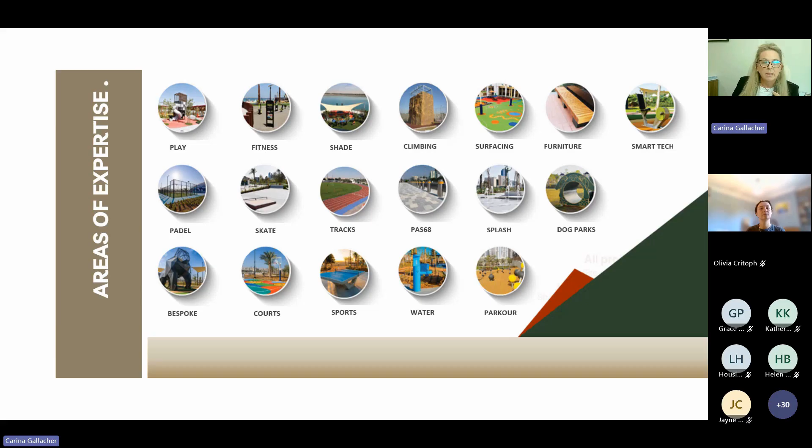I work with main clients, landscape architects and design consultants, specialist fabricators and contractors. Our projects are generally solution focused and grounded in local codes, compliance and safety requirements, so projects are delivered as intended within the region. Let me just give you a flavour of some of the installed projects.

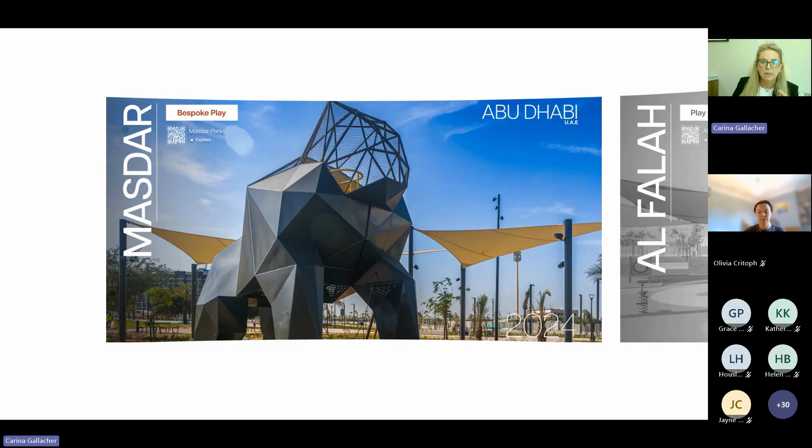So this is an iconic sculptural play park, which has since become known as Gorilla Park. Next, we have a playful destination in Al Falah.

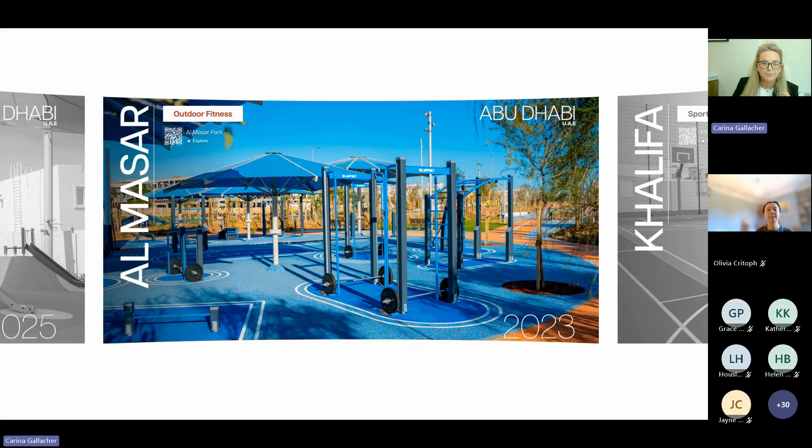Next, a very typical but very popular outdoor fitness area, and standard ball courts that you'll all be familiar with.

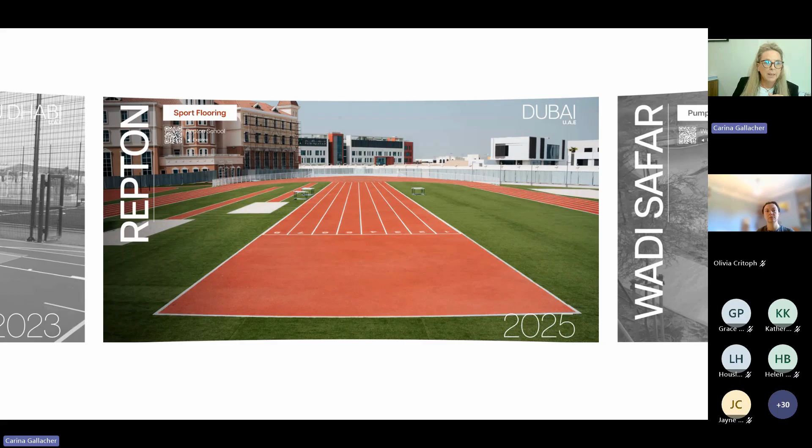This is a non-standard track and pitch at Repton School in Dubai, and I'll return to this example later in the presentation.

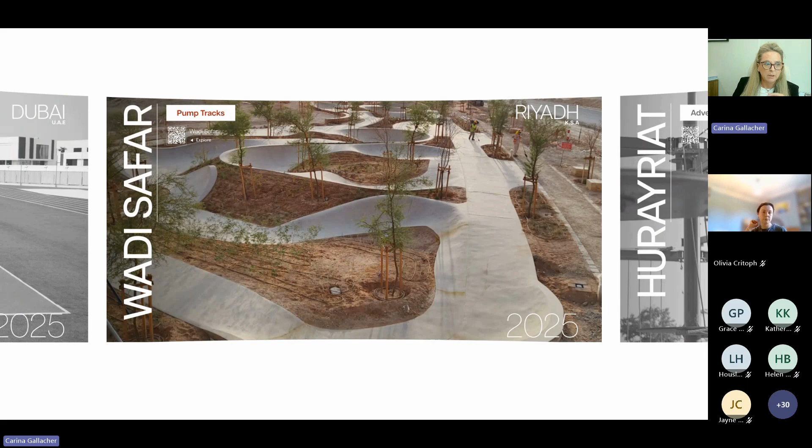This is a newly created pump track in Saudi, and I think once the vegetation has established, it's going to be quite a strong destination.

This is an operator-run high ropes course, climbing wall, free fall and zip line at Hurayriat Island. Incidentally, there's a suspension bridge which was coined by the locals as a bridge to nowhere. It was built in 2012 for about 185 million, but it's no longer the bridge to nowhere.

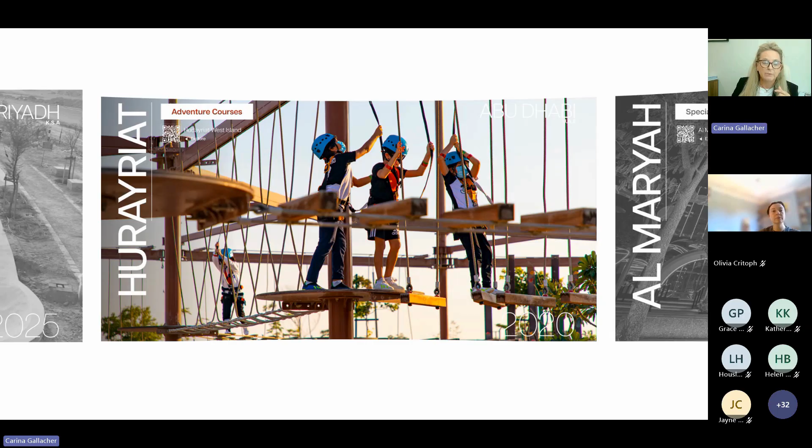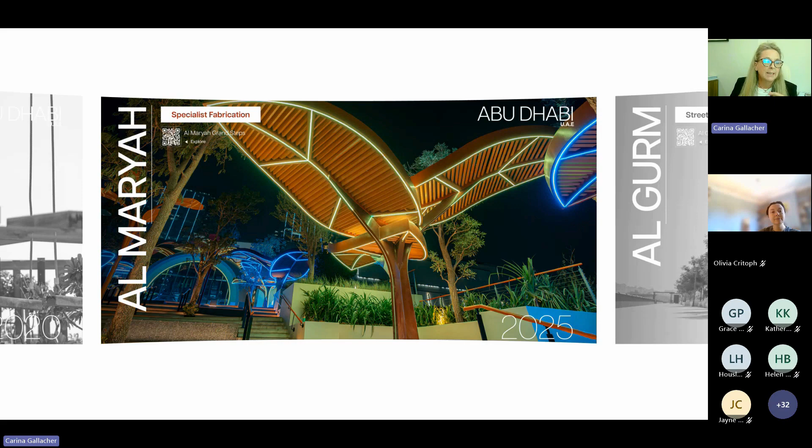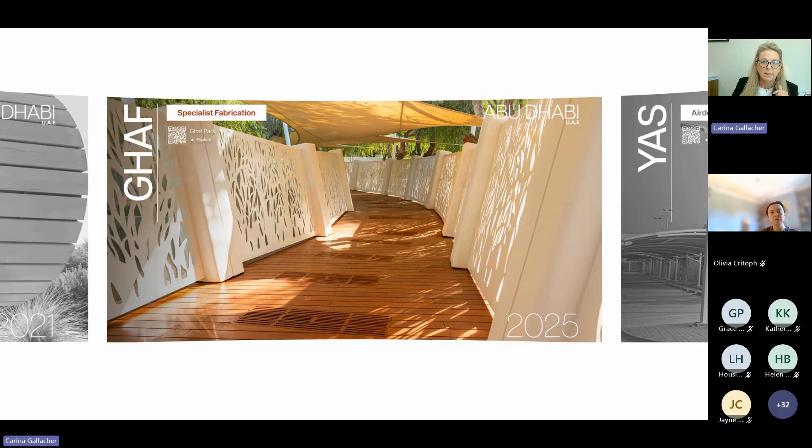This next slide shows specialist architectural shade with integrated smart LED lighting, some bespoke park furniture with integrated shade, a unique cool pathway, which I'll return to later, and leisure domes, where we take the outdoors indoors.

And last but not least, over 120 skate parks have now been designed and built in the region, from pocket parks to competition-worthy destinations, all by Jebel. If you're interested, Jebel means mountain in Arabic.

So when I moved to Abu Dhabi, I arrived, like many expats do, ready to share knowledge with the GCC, to pass on fundamentals of managing parks and public space, to share policy and practice. If I'm honest, I thought I would be sharing my experience with a region still developing its public realm. But what I found was different.

They were eager to learn, but not asking whether change was possible - they were asking how quickly that could happen. They were really willing to experiment and prepared to innovate at a scale I had never seen before.

Instead of asking, how have we always done this, they were asking, what if? What if we designed larger parks for 45-degree summers? What if we integrated futuristic technology from the beginning? What if parks became destinations that could support public health, biodiversity, and economic growth all at the same time?

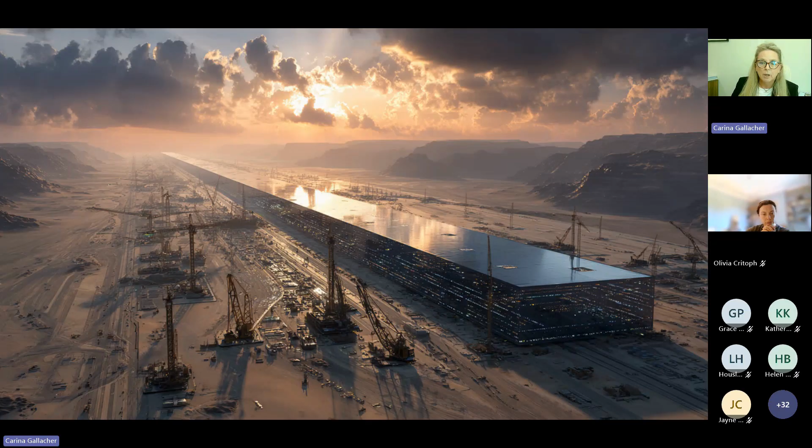So I think we're all familiar with global examples leading the way: Singapore's Supertree Grove for its vertical gardens, venting air, and harvesting solar energy. Perhaps you're familiar with New York's Little Island that withstands rising sea levels and storm surges.

And you may or may not be familiar with some of the giga projects here in the GCC, often dominantly funded by royal decree. This is phase one of the Line Park system in Neom, Saudi Arabia, where they're building a multi-level green corridor completely free of cars.

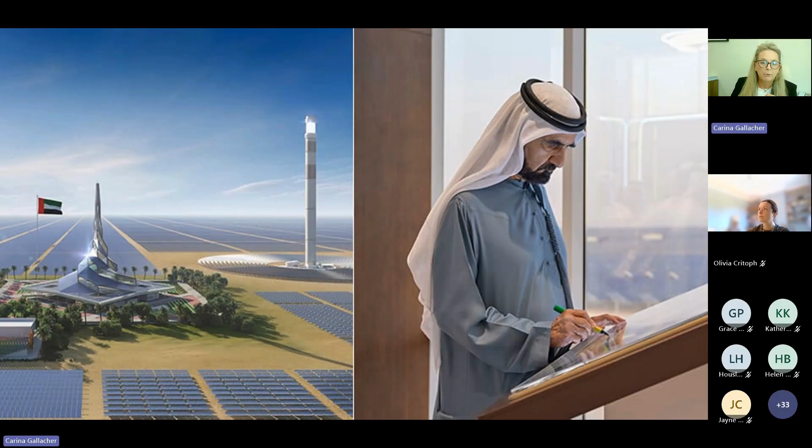By 2050, Al Maktoum International Airport will be the world's largest, serving over 260 million passengers each year, with parks and green public spaces embedded throughout the development, really demonstrating that even major infrastructure now recognises the value of nature and well-being.

The Dubai Transportation Strategy is shooting for 25% of Dubai's total transportation to be autonomous and electrical by 2030.

And the UAE has targeted the year 2051 for it to achieve the title of the world's best country in the Global Food Security Index, which means expanding self-sustaining technological farmed areas, firming international trade partnerships, and enhancing national intake while reducing food loss and food waste.

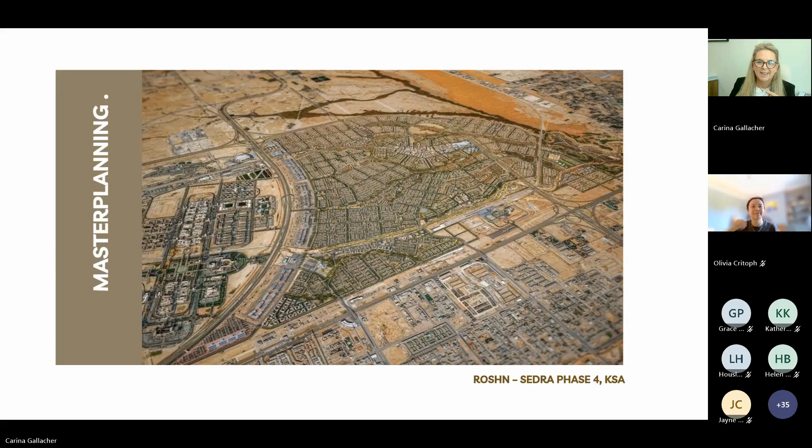But in Abu Dhabi alone, we have projects running at scale. There's an 11 billion dirham project allocated to 5 massive green infrastructure projects for rollout in 26-27, part of a multi-billion urban development framework led by the Department of Municipalities and Transport, to establish Abu Dhabi as one of the world's most livable cities. It focuses heavily on building people-centric, walkable neighbourhoods that balance rapid population growth with high community well-being.

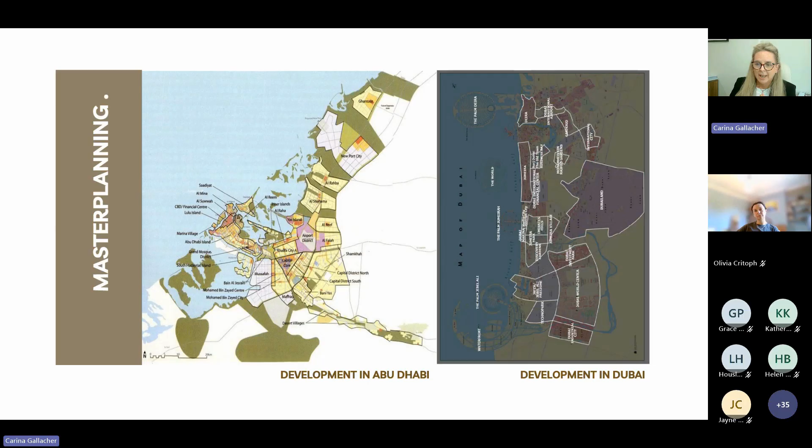So a lack of budget and budget cuts are not synonymous to the UK. It's part of every conversation that we have here in the Middle East.

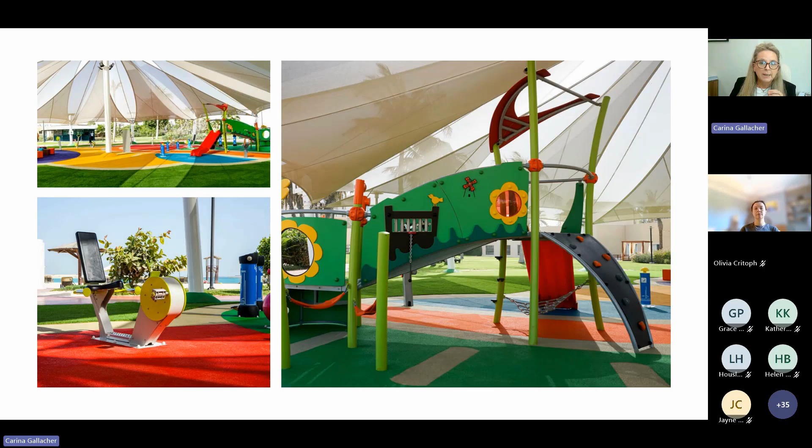But now I'm working on the first fully AI designed park approved under the Dubai 2040 Urban Master Plan. It aims to analyse real-time citizen movements to address exact local community needs. It allows residents to contribute structural ideas which would be optimised by generative AI design.

We accept our government, our developers demand speed, scale, and next level outcomes. Our response here isn't incremental. We're building data-led tools and systems. We use AI across all levels of business, which projects us forward rapidly to be able to respond. And we've effectively become conditioned by this market to think very differently.

So for those of us working in the region, our perspective comes from quite a deep experience in this market, understanding what works, but more importantly, what doesn't work. We accept our environmental demands more, and that pressure drives us better, and it ultimately produces more resilient outcomes. So I think when people ask me what has driven innovation in the Middle East, many expect my answer to be investment, but my answer is climate.

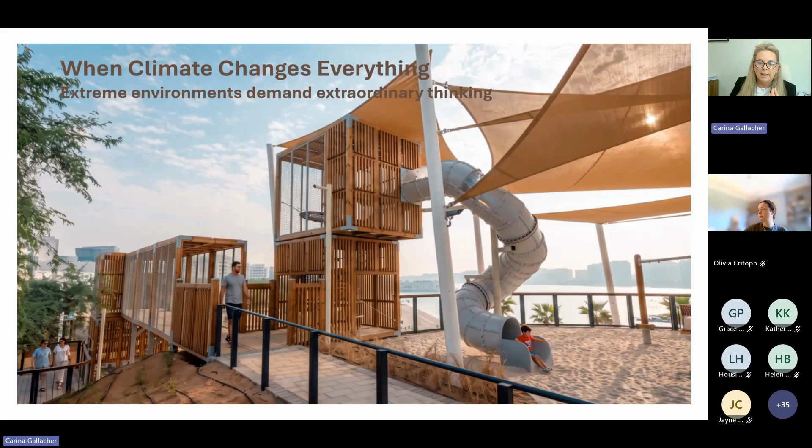That pressure has driven innovation, as I've said, across design, engineering, maintenance, and operations in ways that have relevance far beyond the Gulf. And that's where we can learn from each other. So the most important question has become, how do we make people comfortable outdoors? How to build something that makes the most of 6 to 7 genuinely comfortable months while still protecting people during the other 5.

So shade shouldn't be an afterthought, it should be planned like MEP. It's foundational. And as temperatures rise elsewhere, it will also become essential elsewhere. So heights, wind loads, post positioning, structural calculations, integrated lighting - it's my daily love language, to be honest. We understand that...

Tensile shade structures, sails - they can block 90 to 97% of UV radiation and reduce surface temperatures beneath by approximately 8 to 12 degrees when properly angled.

Bioclimatic pergolas with adjustable louvres let winter sun in, and they can also block summer heat without choking off airflow. Neem trees, native trees, can drastically cut solar radiation, whilst Ghaf trees offer a native drought-resistant alternative.

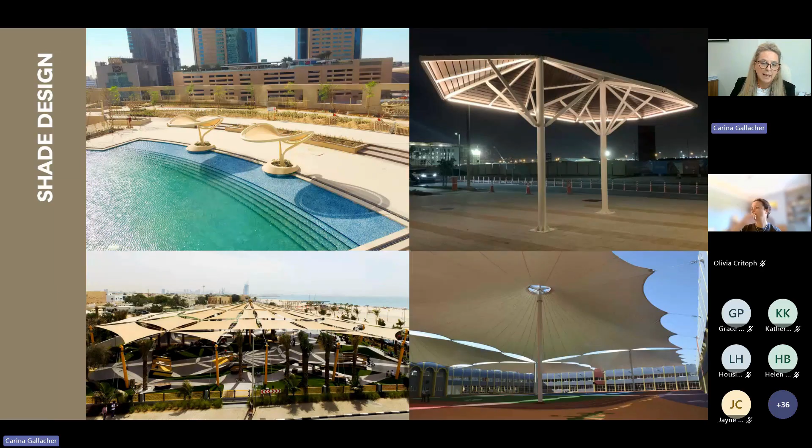The buildings themselves can create shade through smart proportions, narrow pathways with the right height to width ratio, because they cast shadow across pedestrian routes. You can see this exact principle in Masdar City's street layout, which I'll discuss shortly.

We also integrate smart technology into canopies and walkways. This example is driven by the client's need to make tourists comfortable walking between museums within the cultural district on Saadiyat Island, locals comfortable in commuter spaces, and communities active in cultural parks. We introduced sensor-driven air conditioning pathways to really reduce the ambient temperature below the shade itself.

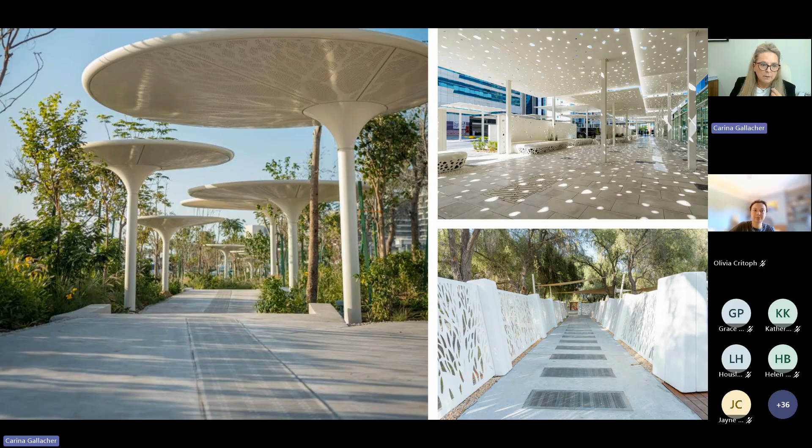I guess you can call us crazy, but it works. So cooling systems are another way to reduce ambient temperatures by 2 to 4 degrees.

We've established through experience that high pressure misting works well inland in drier air. The water evaporates and pulls heat with it. Near the coast, where humidity is already high, that same system evaporates more slowly, and does far less work.

Water features for us follow the same logic. Splash pads and misting arches make sense inland, whilst coastal spaces do better with visual water features, fountains, canals, paired with actual ventilation corridors, rather than more misting piled onto already humidified air.

Another point I want to mention is that UAE water has enough mineral content to clog misting nozzles within 6 to 8 weeks without proper filtration. So for us, a brilliant cooling system with no maintenance plan is really a 6-week solution to a 12-month problem. We have to pay attention to what we're doing and where.

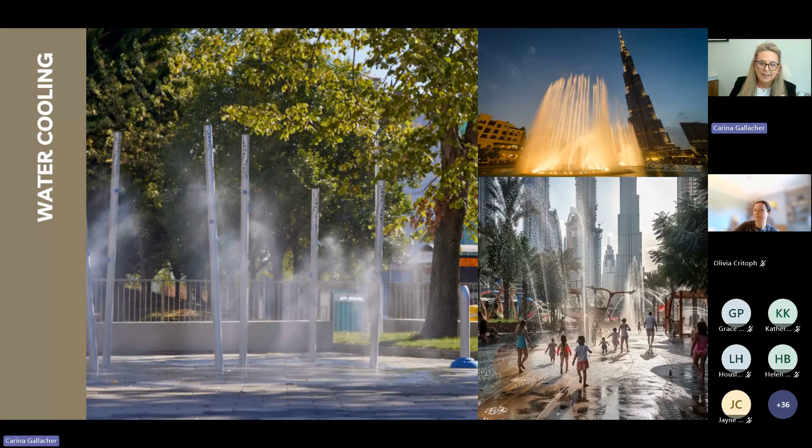We mustn't forget, it's not just a cooling feature. Water in parks also shapes comfort, identity, and emotion. Like the UK likes the sun, but not too much, as there's no air conditioning over there. By comparison, the UAE likes water, but not too much. Here's an example of what we experience here.

Dubai faced significant flooding in recent years. The UAE's infrastructure is really designed for arid conditions, meaning its drainage systems are insufficient during sudden heavy downpours. Climate change and unusual weather patterns have contributed to the increasing frequency and intensity of such events. In April 2024, the UAE recorded its heaviest rainfall in 75 years, causing road closures, resulting in 5 fatalities, and insurance losses were estimated at $3.4 billion US dollars.

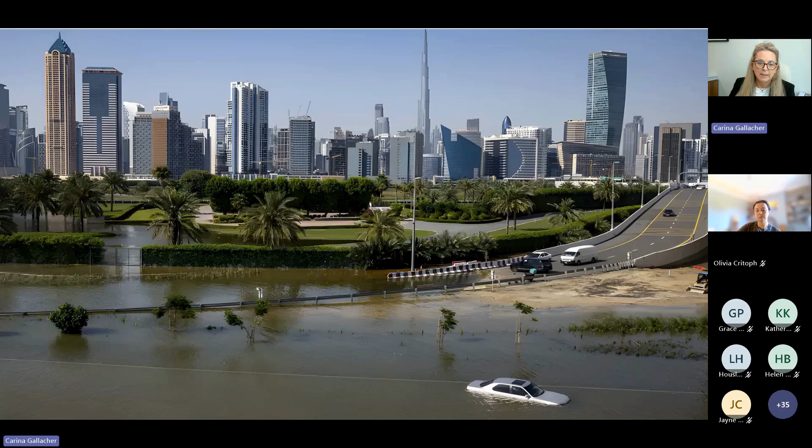In December 2025, just a year later, Dubai experienced even heavier rains, turning streets into rivers. Authorities advised residents to stay indoors and encouraged remote work for the private sector. In March of this year, we had 4 inches of rainfall over 4 days, which led to mass urban flooding. Consequently, climate resilient smart drainage systems are being used to mitigate future flood risk.

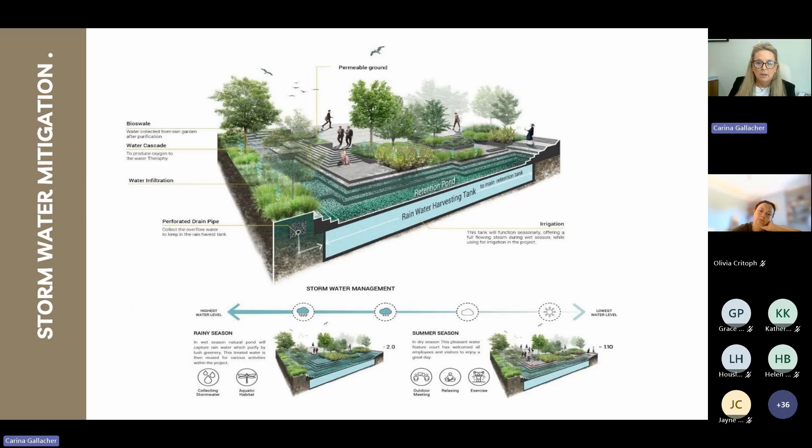Intelligent bioswales are now a core feature of new developments and increasingly retrofitted into established communities. Rainwater harvesting, as you know, is not a recent phenomenon. Here in the UAE, it's an ancient necessity.

Al Ain Oasis is a perfect example. This UNESCO World Heritage Site is really a masterclass in blending time-tested climate adaptation methods with modern digital management layers, and it serves as a living blueprint for the future of desert parks. The ancient Falaj underground irrigation network is integrated with modern fluid sensors that check water levels and soil saturation across 147,000 date palms in this park.

The dense and multi-tiered canopy system, where the tall date palms are located, blocks the intense sun. The smaller fruit trees provide secondary shade, and the ground crops, cooling the soil, naturally lower the park temperature by several degrees without using artificial power.

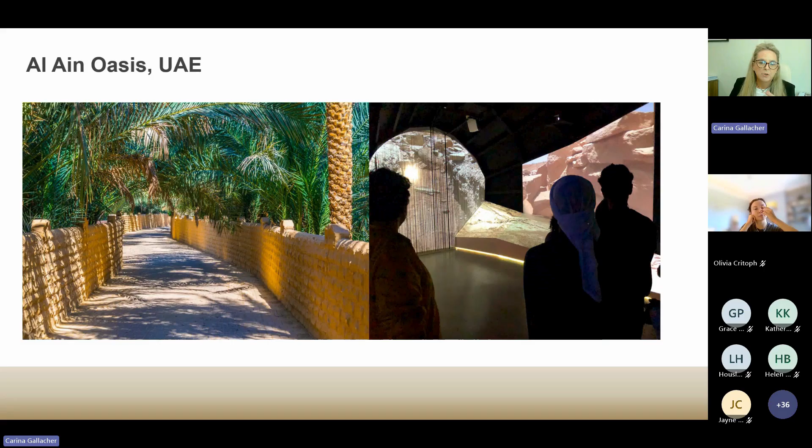The park now has a digital eco-centre, which features an interactive low-emission educational centre, and visitors are able to interact with generative mapping games to model future desert oasis systems and understand resource balance, demonstrating how these extraordinary landscapes have continued to thrive for future generations.

Whilst Al Ain Oasis is an ancient park setting with modern tech, Masdar City parks are the modern equivalent. This was designed by Foster and Partners, UK architects, and they combine modern and ancient sustainable living practices.

The pavements here convert footsteps into electricity to power park lighting. There are drone delivery hubs with designated landing zones to safely receive automated medical and food payloads. There are driverless cars and electric monorails within the space.

So proving that innovation doesn't replace heritage. It builds upon, it creates places that are smarter and more resilient and more connected to their environment. So I think for me, the future of parks isn't about choosing between technology and tradition.

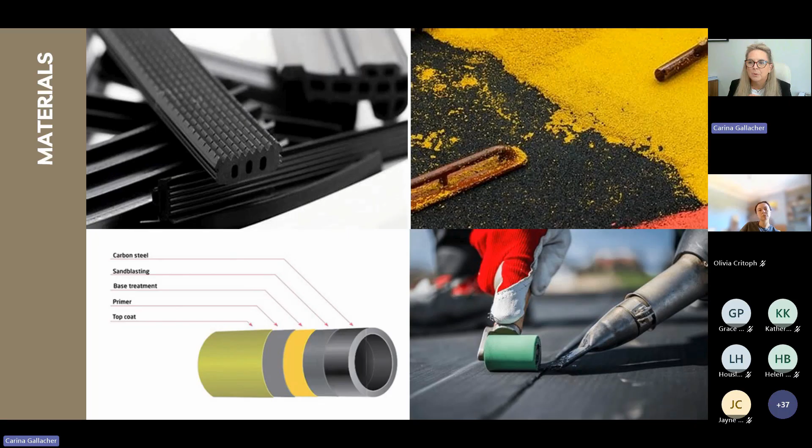Solar panels are often coated in a fine dust and sand, hence you don't really see as many of them as one would think. So technology such as windscreen wipers that clean those solar panels is currently being explored.

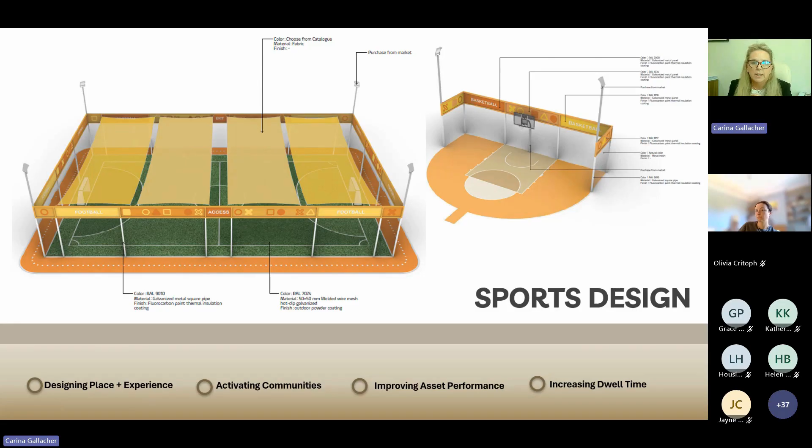Increasingly, we use materials that combine thermal reduction with performance enhancing specifications so that we can create high performing spaces to support healthier lifestyles, and with that all-important shade structure, keep people coming back and using the space.

So let me explain. I mentioned Repton School in an earlier slide. Repton School is designed to transform the way students experience sport. Their sports village offers state-of-the-art facilities, including 2 full-sized certified 3G rugby and football pitches, as well as a junior field, a 200-metre running track, 100-metre sprint track, a multi-sport AstroTurf with cricket square, shaded multi-use courts for netball and tennis, padel and pickleball courts, and that's just outside. The indoor facilities are equally impressive.

I think the kids are rather lucky, and their opening was celebrated with visits from football legends and UFC champions. The main takeaway, what's important to know, is the use of a cork granular infill that lowers the ambient temperature of the artificial grass system. It lowers the temperature between 5 to 12 degrees at midday.

Through innovation and new materials, we've enhanced the thermal comfort, which encourages increased usage of these sports spaces and directly enhances athletic performance. The same system is now being used in public parks, improving their comfort rating, dwell time and value as sports spaces, ultimately improving the user experience and their value.

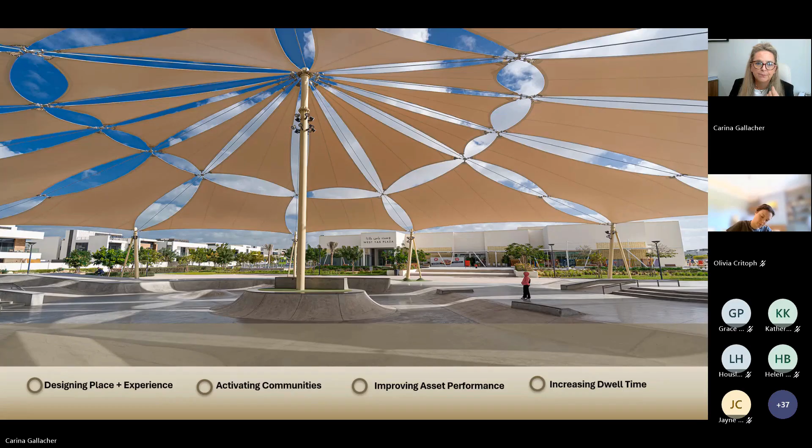Local skaters, who obviously work up a sweat, are definitely more comfortable riding West Yas than other inner city skate parks, which proves visitors shift their behaviour, because they will move to different locations depending on where they're more comfortable.

Essentially, in the UAE, comfort dictates seasonality, so parks are used when conditions are safe and enjoyable. This teaches us that climate resilience isn't optional, it's foundational. None of this is about fighting the climate, but intelligently designing with the information that climate gives us: these heat sinks, prevailing winds, stormwater, and that's before any material gets ordered or a single tree gets planted.

I know I've talked a lot about heat, but the UAE has some genuinely excellent outdoor weather for more than half the year. Please do come and experience the region. When heat becomes manageable, parks and public realm become places people want to be in, even in challenging climates.

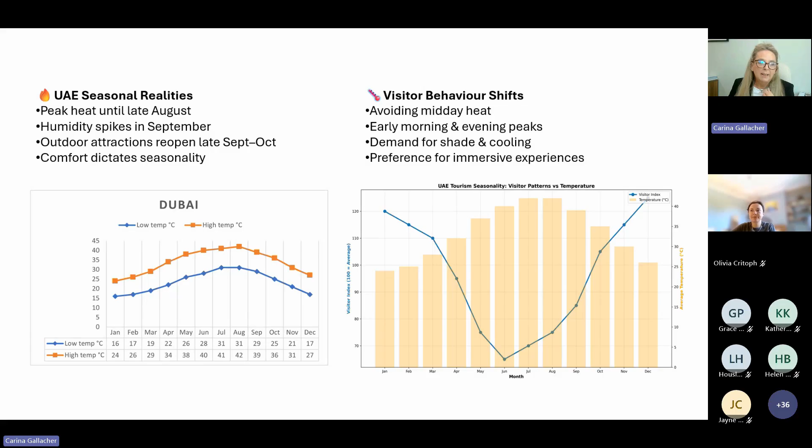As cities expand and waterfronts are developed, natural spaces are often lost and people are displaced. I spoke earlier about how we make people comfortable outdoors. Something as simple as well-designed, well-placed, shaded seating increases dwell time by 50 to 70% and transforms the space from somewhere people pass through into somewhere they choose to stay. It provides a place for fishermen to rest their rods, or a commuter to take a break, or a family to pause and enjoy the waterfront.

Small interventions create moments, strengthen connections, and encourage people to stay longer and return more often. People rarely remember the space, they remember how it made them feel.

For decades, the park sector has focused on maintenance, standards, biodiversity, accessibility, and facilities, and these remain fundamental. But today, public spaces are increasingly expected to offer something more: greater engagement, stronger place identity, and lasting value.

On Al Marjan Island, the focus is on experience. Designed primarily for evening use when temperatures are cooler, these musical swings, illuminated seesaws, destination hammocks, and tetherball make these areas come alive. These simple interventions encourage people to stop, interact, and spend much more time in these spaces. Whilst high quality design matters, it's the memorable experiences that protect the long-term value of these spaces.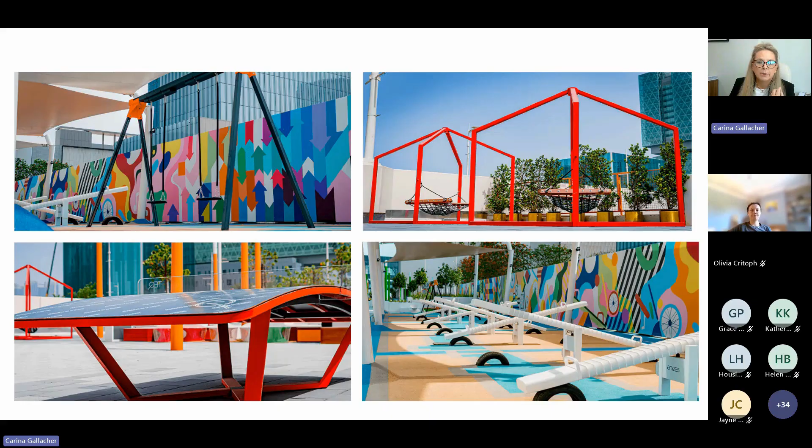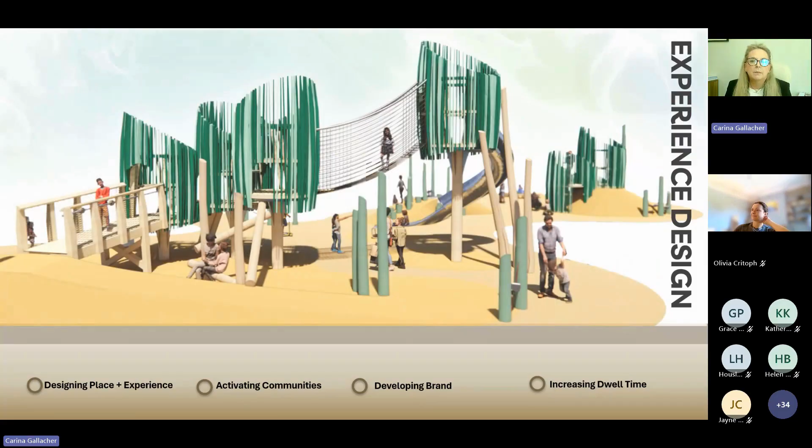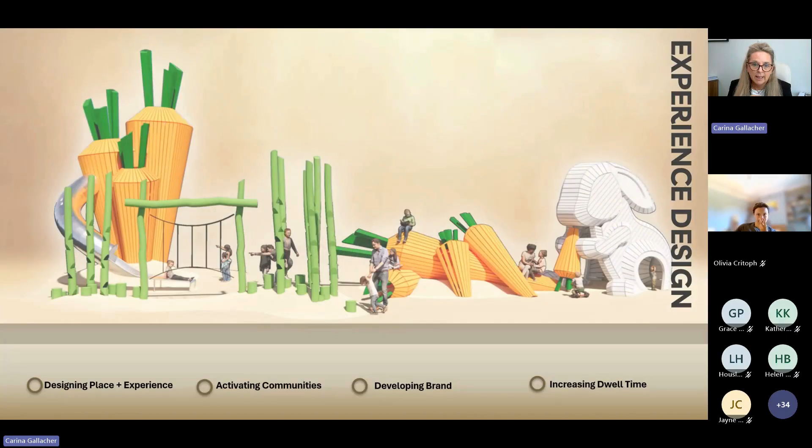So I think the slide will show some bespoke play areas. Here we go. Bespoke play areas do far more than provide somewhere for children to play in this region. These spaces have become destinations. They encourage healthy risk-taking, as we all know. They challenge and provide cooperative play opportunities.

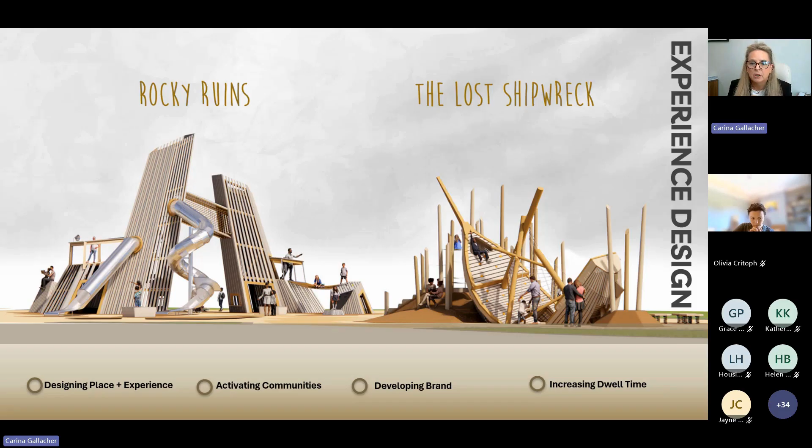But in a region where busy lifestyles often mean children spend much more time with maids than they should, these types of spaces create valuable opportunities for meaningful family time. At the same time, they create memorable experiences that strengthen destination, build emotional connections, and give families a reason to return.

One of the most powerful yet overlooked aspects of park design is not what people experience, but what they remember. Behavioral psychologist Daniel Kahneman suggests people don't remember every moment, but they do remember those highs and how the experience ends. So for designers, that means creating moments of surprise, discovery, challenge, and wonder.

While each of these parks here are unique, they all share that same principle. There's storytelling, immersion, social connection, and cultural identity. They show how thoughtful design transforms climate challenges into memorable experiences - where shade becomes beauty, water becomes theatre, and culture becomes something people experience rather than simply seeing. This is memory making design, and it creates places people remember, recommend, and return to.

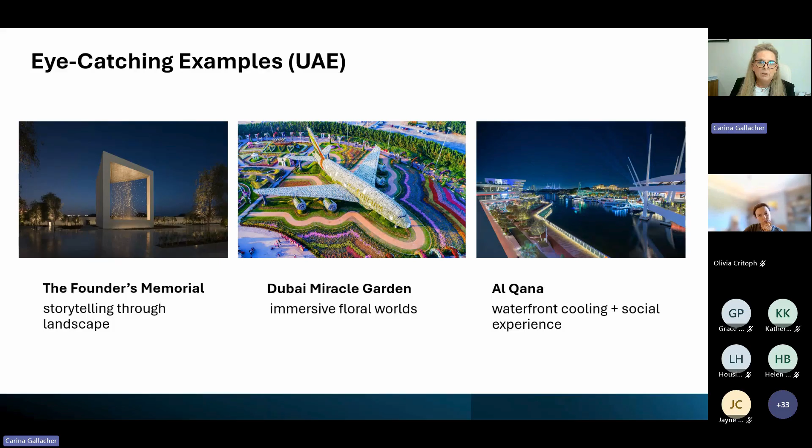Most of us here will know that the Green Flag Award recognises that excellence isn't measured solely by the quality of a landscape, but by how well it's used. The most successful parks attract diverse communities, encourage repeat visits, and remain active across the seasons, year after year.

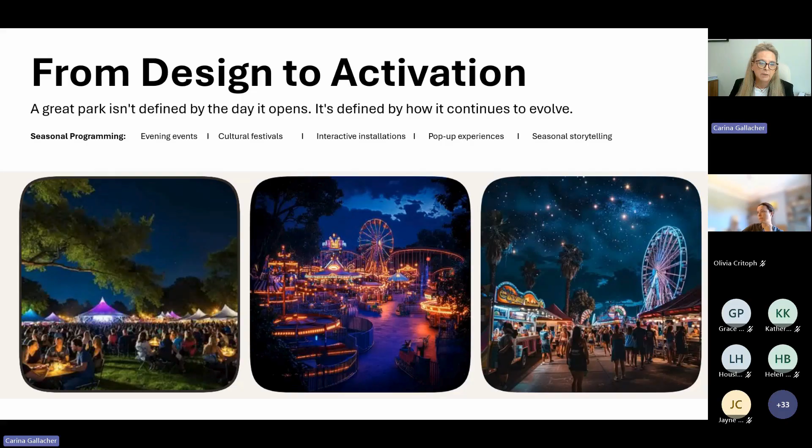And in the UAE, parks transform after sunset. As temperatures fall, evening programming creates new opportunities for recreation, culture, and social connection, particularly during those hotter summer months.

But memorable experiences don't just create stronger destinations, they create healthier communities. We've long understood the physical benefits of parks, but their impact goes far beyond exercise. In a region facing rising rates of stress, obesity, and diabetes, well-designed parks provide places to reconnect, recover, and recharge.

Research in neuroscience and environmental psychology now shows that the way we design landscapes directly influences how people feel. Elements such as natural sound, fractal light, texture, and organic forms can reduce stress, improve focus, and support emotional well-being. They're not simply aesthetic choices, they're design decisions that shape human experience. The parks of the future won't just be judged on how they look or function, but how they make people feel, what they help people remember, and the well-being they deliver.

So if we look at the interconnectedness of this model, every successful park needs all three working pillars. The next three award-winning case studies all demonstrate these principles, and each one has become recognised for pushing one pillar perhaps a little further than the others.

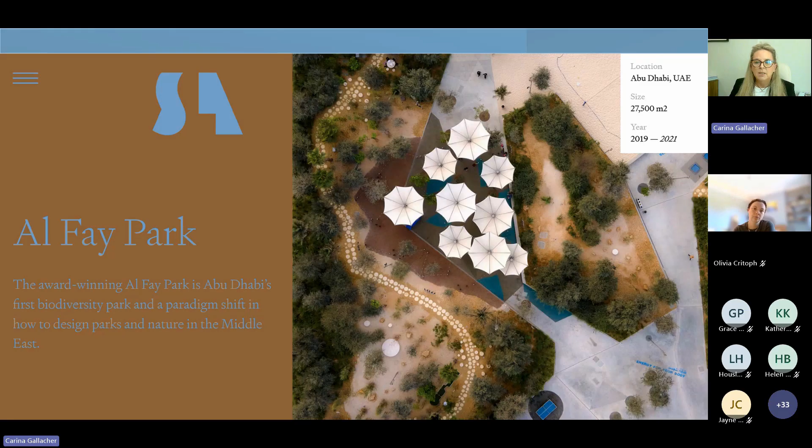Al Fay Park demonstrated that climate responsive design isn't just about surviving extreme heat. It creates destinations that are both environmentally resilient and genuinely enjoyable, and earned its reputation as the coolest place in town, both literally and metaphorically.

What makes Al Fay Park remarkable? Through intelligent microclimate design and highly efficient irrigation, the park uses around 40% less water than a traditional park, creating a noticeably more comfortable environment. There are 2,000 native trees and shrubs, including native ghaf trees, carefully selected to provide biodiversity, natural shade, and cooling.

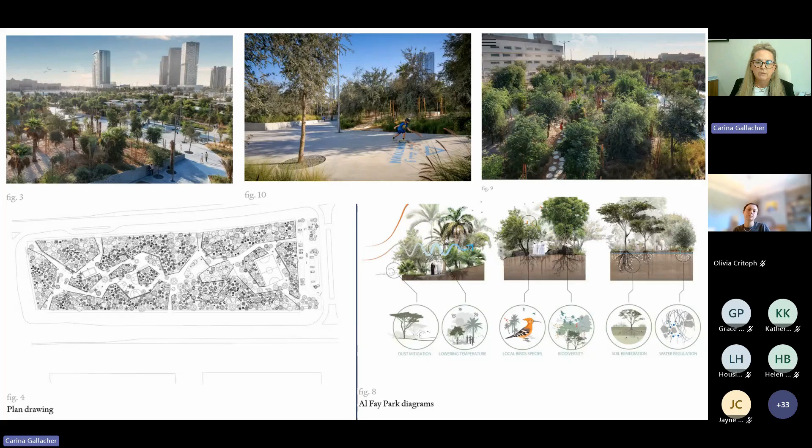I think what's the most important part of this design and build is the process. Ecologists, planting specialists, landscape architects, recreation experts all worked together from the very beginning, and the result is a park that's not just beautiful, it's an ecosystem, it's a social space, and a piece of climate infrastructure all in one. The real takeaway is that when we design parks as integrated systems rather than collections of features, they perform so much better for nature and for the city.

I do have a video, but I'm wondering if there's time to share that, or whether I should share it after. Maybe I'll just start this, and maybe we can return at the end or share it with everyone after. Let me just begin. Can everyone hear? Is there sound? I think the sound isn't working right now. We can share it after if that's easier, I can put a link in the chat maybe.

So I won't take you on a short walk through this park. I'll share that with you, and hopefully you can take that walk later in your own time.

Let's move on to the second case study, 104 neighbourhood parks. This was implemented by the Department for Municipalities and Transport, aiming to transform underutilised land within accessible community areas across Khalifa City A, Shakhbout, and Mohammed bin Zayed City, older areas of Abu Dhabi. They delivered in just 6 to 8 weeks through a fast-track design and build programme. Each park was tailored to its local community, incorporating native planting, shaded walkways, sports courts, playgrounds, and social spaces, many located alongside neighbourhood mosques.

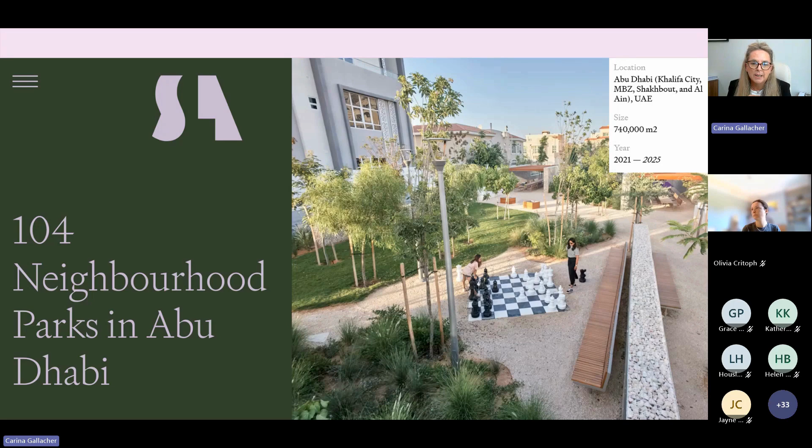In total, the programme transformed 740,000 square meters of land. It introduced more than 22,500 trees, increased biodiversity by 500%, and several parks have since achieved Green Flag Award status. The project also went on to receive international recognition, the 2023 Monocle Design Award, for its outstanding contribution to neighbourhood public spaces.

What makes this programme particularly interesting is how smart technology was seamlessly integrated into everyday park management. IoT sensors collect real-time data, monitoring park usage, maintenance needs and safety. Adaptive LED lighting responds to movement, reducing energy consumption while creating safer environments after dark. Wi-Fi enabled smart benches and mobile connectivity enhance the visitor experience, and automated security alert systems allow faster response when incidents do occur.

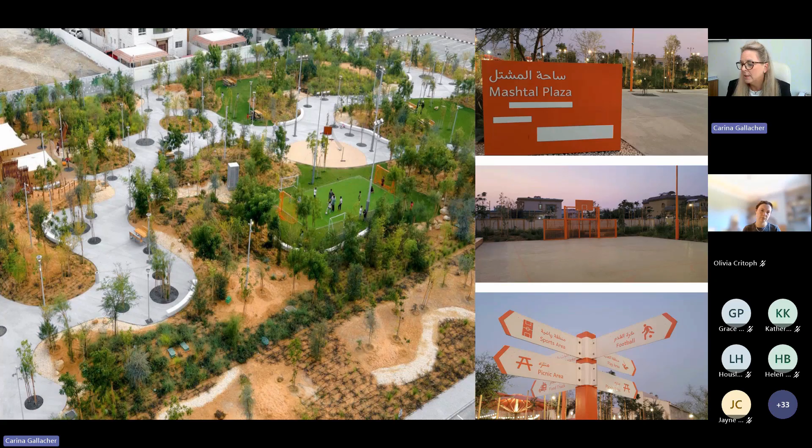These parks really demonstrate how smart infrastructure transforms public spaces from places simply to visit into connected, efficient and sustainable community assets, helping create healthier, happier cities for the future.

At the heart of that programme is SLIM, a computational landscape information modelling tool that combines advanced 3D modelling with ecological and social data, developed over a decade of experience in the Middle East. The result is smarter, data-driven design that balances environmental performance with community need. This approach earned SLIM the AEC Tech Award for Most Sustainable Technology.

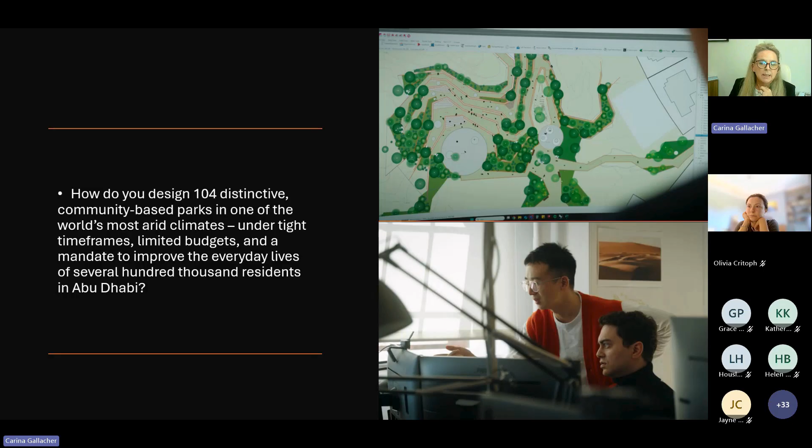Our third and final case study is Al Masar Park. In 2025, it was awarded the Green Flag Award, and it's Abu Dhabi's first linear sports park. It stretches over 800 metres.

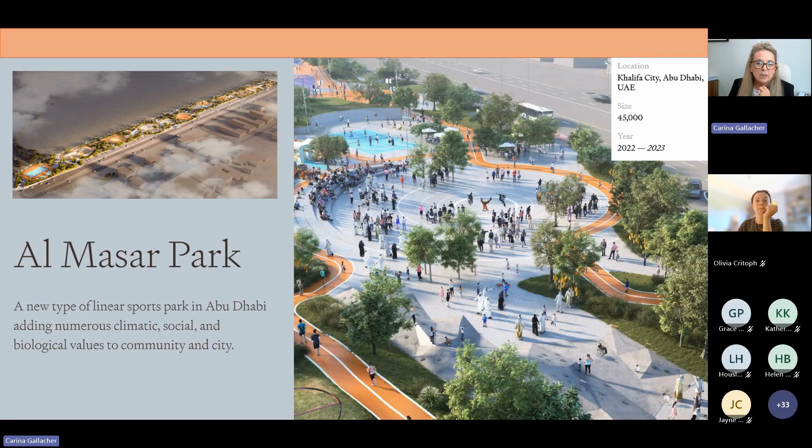It combines advanced microclimate design with nature and community to create a connected public space that promotes outdoor well-being, active lifestyles and social interaction. It's more than just a park - it links people, nature and neighbourhoods, creating places to exercise, meet, relax and enjoy the city throughout the year.

Al Masar is shaped by Abu Dhabi's natural landscape, so its rolling landforms are inspired by the desert terrain and carefully positioned to capture the cooling northwest winds, creating a more comfortable microclimate throughout the park.

The park is really designed to support active social living, offering spaces for sport, fitness, relaxation, and community events. It has a 2-kilometre running and cycling loop that connects the entire park.

What makes it truly special is the connection that people have with it. It really has become a much loved destination where families, friends, people from many different cultures come together to exercise, socialize and create lasting memories.

Like any successful park, its popularity brings many challenges. Heavy use means that ongoing maintenance and investment are essential to preserve the high quality that the community values so highly.

Whilst much of the world paused during COVID, the UAE accelerated. Rather than waiting for normality to return, governments and developers here used the opportunity to rethink what parks could become. Driven by extreme heat, water scarcity, rapid urbanisation, and changing public expectations, the region has delivered some of the world's most innovative parks.